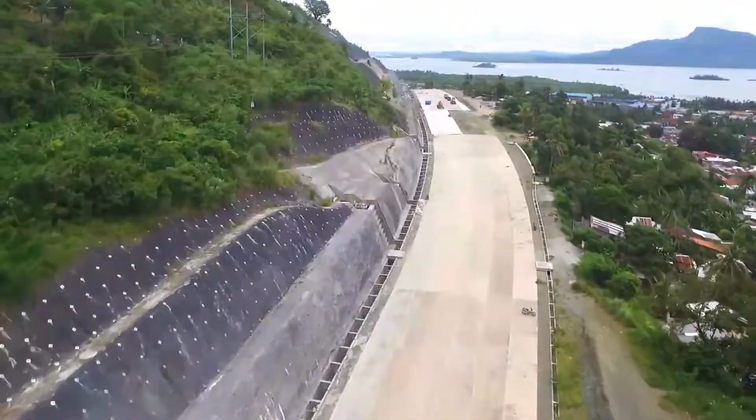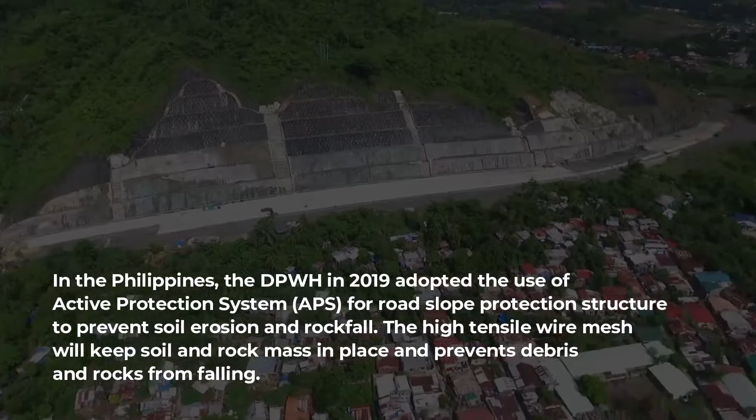In the Philippines, the DPWH in 2019 adopted the use of Active Protection System (APS) for road slope protection structure to prevent soil erosion and rockfall. The high tensile wire mesh will keep soil and rock mass in place and prevents debris and rocks from falling.

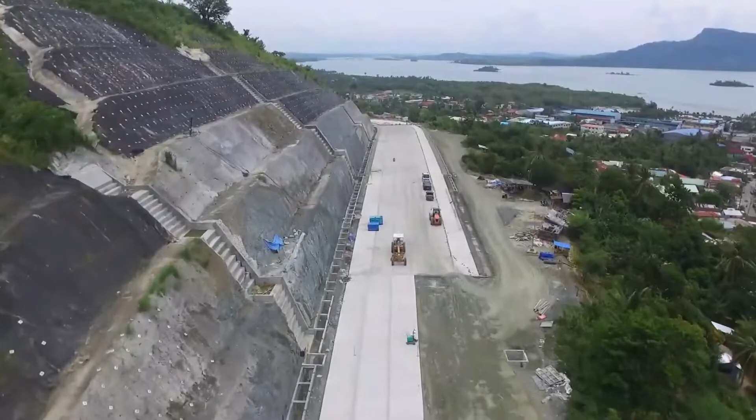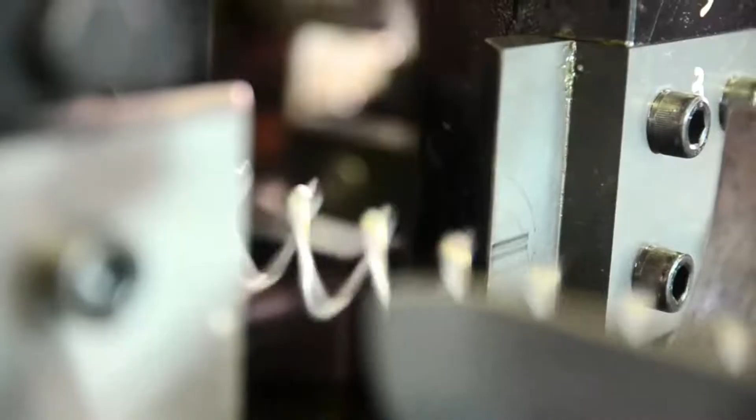The project design improvement of existing chain-link fencing machine to produce slope protection circular wire mesh is a joint R&D collaboration project that brings together the following parties. Rebtrade International Corporation (RIC) as the private partner and committed adopter of the resulting technology, and the Metals Industry Research and Development Center (MIRDC) of DOST as the technology partner.

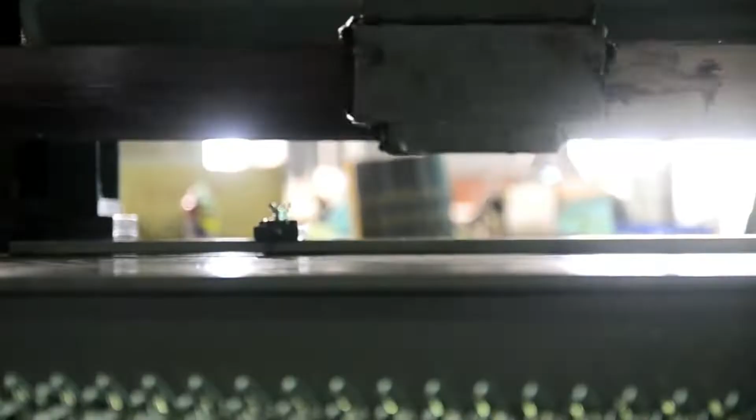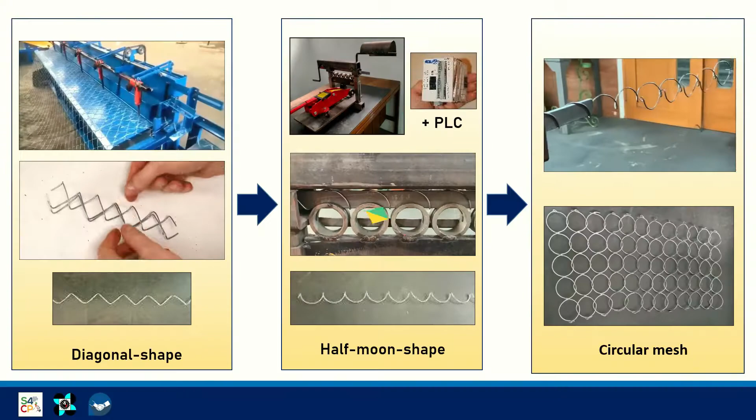The project's general objective is to develop a machine prototype that can produce circular wire mesh for a slope protection system based on RIC's requirements. Its specific objectives include: 1. To design and fabricate a new mold assembly to create a circular wire mesh.

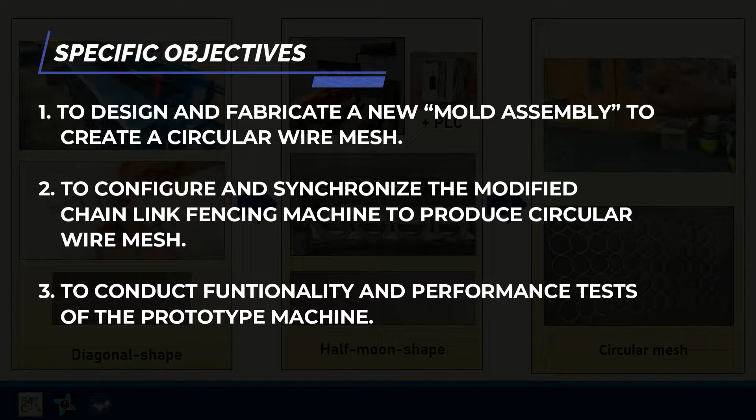2. To configure and synchronize the modified chain-link fencing machine to produce circular wire mesh. 3. To conduct functionality and performance tests of the prototype machine.

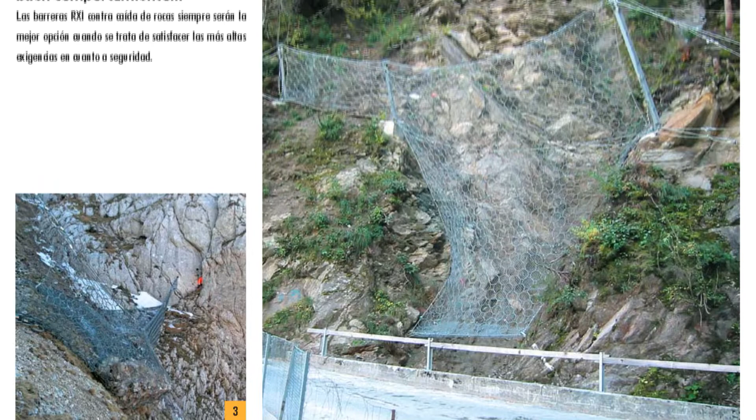The technology would enable RIC to locally manufacture wire mesh, instead of importing it from its supplier, Geobrugg, in Switzerland. The intention is to import high tensile wires and manufacture the mesh locally, which will be different from any foreign suppliers.

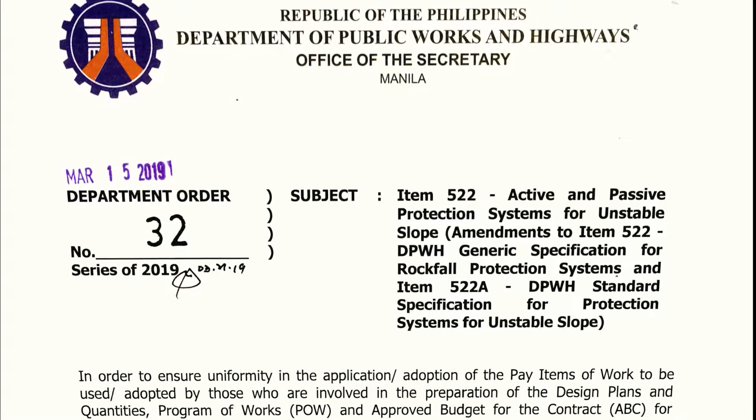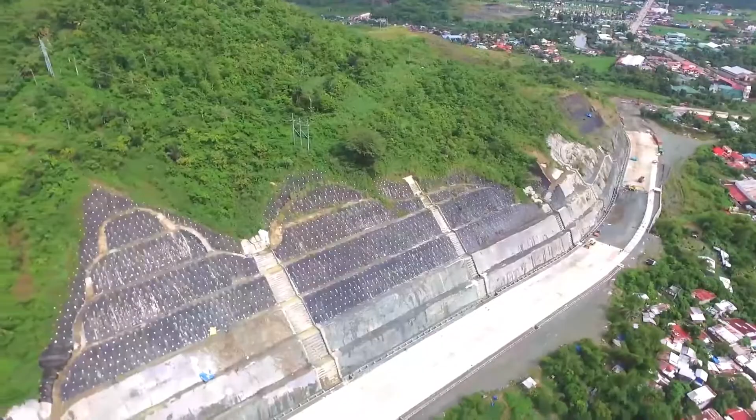The Department of Public Works and Highways (DPWH) has adopted slope protection wire mesh as part of its Active Protection System (APS) for its slope protection projects in the country. They applied the APS technology to prevent soil erosion and rock fall and are contracting its implementation to the contractors accredited by the Philippine Contractors Accreditation Board (PCAB).

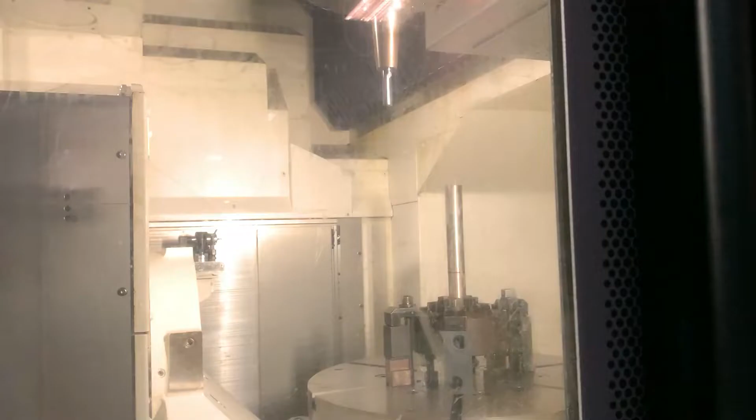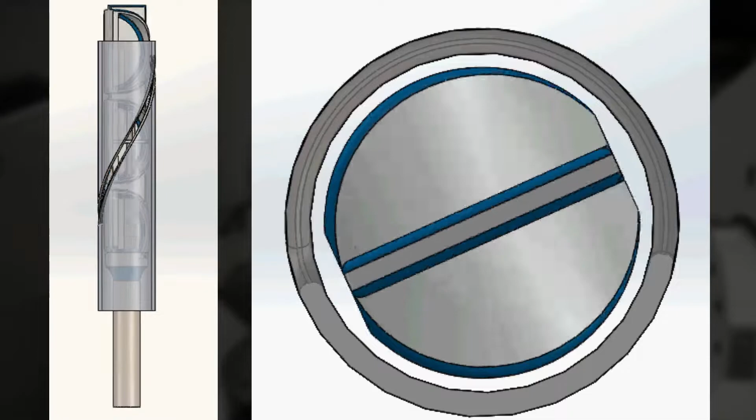The MIRDC and RIC comprehended that this problem requires R&D intervention and agreed to propose a project for funding to the Collaborative Research and Development to Leverage Philippine Economy or CRADLE program. This R&D project aims to develop a machine prototype that can produce the RIC's desired structure of the circular wire mesh and is compliant with the requirements of DPWH.

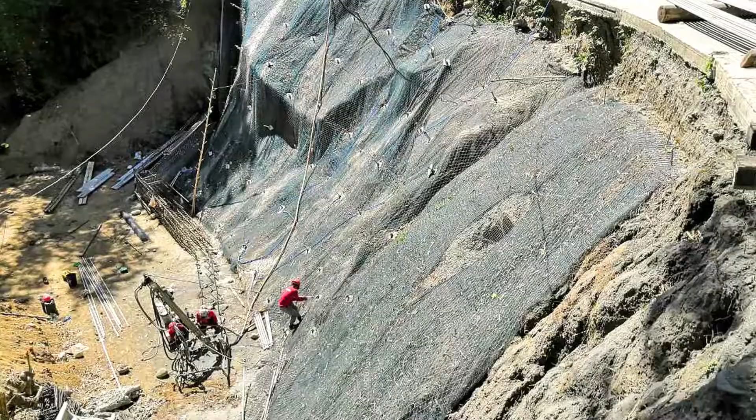Using the developed machine shall be an effective solution in preventing landslides which often lead to total road closures. The following are the benefits achieved by ensuring our roads remain open. 1. Continuous delivery of basic goods and services from one region to another.

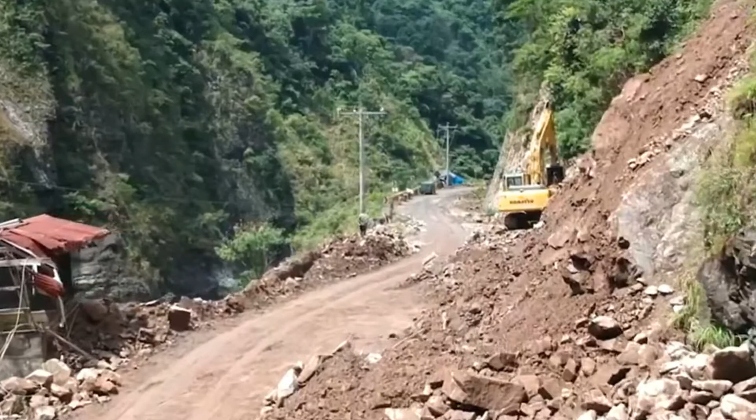2. Reduced carbon footprint, since the use of cement is eliminated. This allows growth of vegetation and trees that regrow in the mountain slope that results in a green environment. 3. Increases people's ability to access education, employment, and services in other nearby regions.

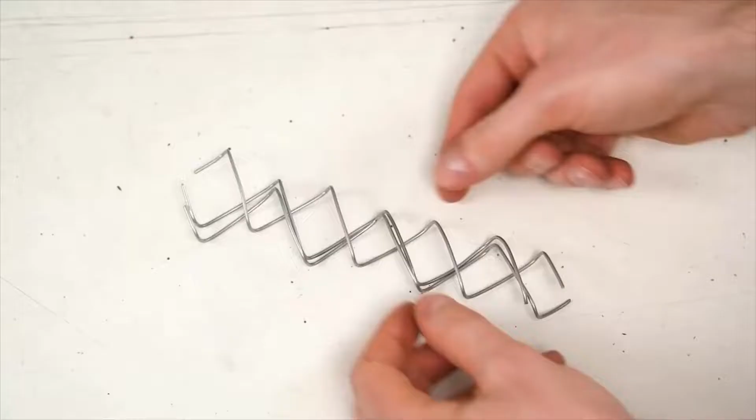The developed machine can produce at a lower cost of production at 800 pesos per square meter of cyclone wire mesh as compared to the imported diagonal wire mesh that costs 3,500 pesos per square meter. This will generate additional income to the company as well as provide additional employment.